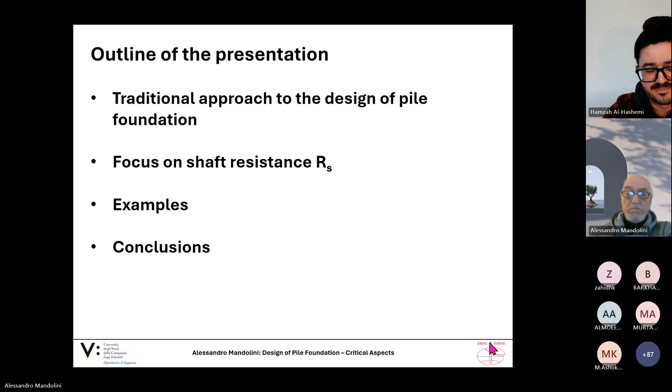The first point we have to take is to recall what we as foundation engineers typically do when the decision of using piles has been taken. It means I will not deal with all the problems related to selecting the right type of foundations depending on the structure, soil conditions, and economical aspects of a design, which is a very complex matter. I will go directly to pile foundations, assuming that all the thoughts about why we are selecting piles have been analyzed and the decision has been taken.

Typically, in a traditional design approach, we focus our attention on the single pile response to vertical and horizontal loads in terms of bearing capacity and movements. Here you can see typical load settlement relationships coming from some experiments on single piles.

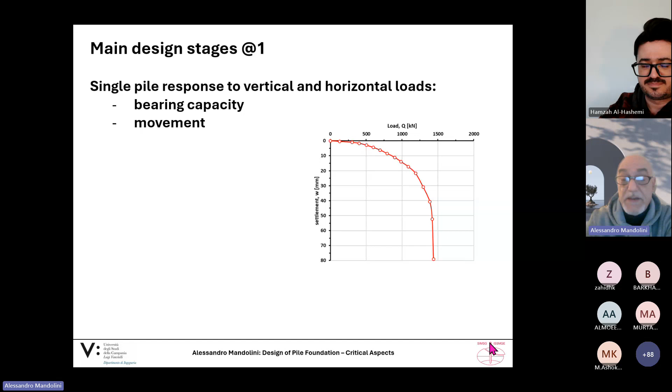Then we try to extrapolate the behavior of single piles to the group by considering the interaction among piles, both when approaching failure, looking at single pile failure or row of piles or block failure mechanisms, and then under design working loads, because we are requested to give our estimate of vertical and horizontal displacements, rotations, and so on, in order to be sure that under working conditions all the limit states are fulfilled and the expected behavior of a structure is satisfied.

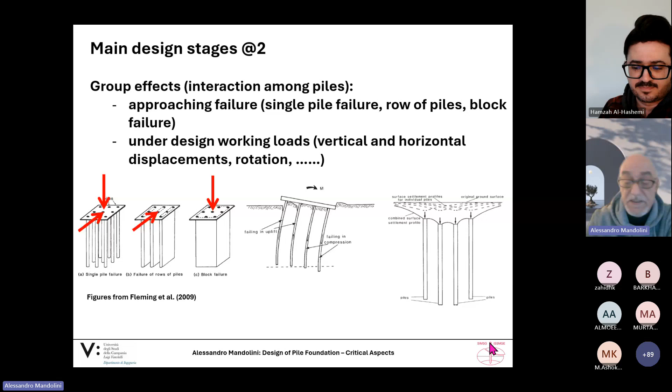What is very important to recall is that the prediction of single pile response to loads is a fundamental step of the design process, because we are always asked to predict in a better way the response to load. We must be aware that any error concerning the prediction of the behavior of the single pile is reflected, if not amplified, in the prediction of the behavior of the entire pile foundation. That means we must be very careful when dealing with single pile response to load, because the reliability of our design strictly depends on how reliable is the prediction of the single pile.

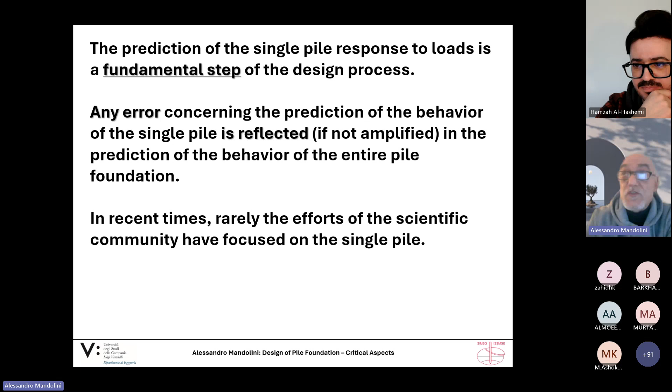I have noted, and the paper I mentioned is in some way a proof of that, that in recent times, rarely have the efforts of the scientific community focused on the single pile. In recent years we have seen growth of methods concerning pile groups and pile rafts, but regarding single piles, it seems the accumulated knowledge in the past was considered enough to proceed. This is my personal opinion, so I think we have to go back to the single pile in order to improve our capability to correctly design pile foundations.

So if we concentrate our attention on vertical loads, because it's the most typical loading condition on pile foundations, as all of you know, the applied load at the head of the pile is resisted by shaft friction, Q sub S, and normal stress at the pile base, Q sub B.

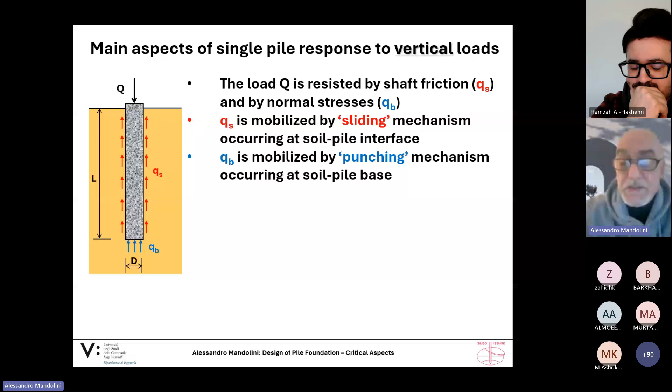The two unit resistances are mobilized by very different mechanisms. The shaft friction is mobilized by sliding mechanisms occurring at the soil-pile interface, while the base resistance is mobilized by punching mechanisms occurring at the soil-pile base. These two different mechanisms imply that the required movements are very different: few millimeters for the sliding mechanisms along the pile shaft, and some percent of pile diameter, meaning centimeters if not tens of centimeters, one or two orders of magnitude larger, for the punching mechanisms at the pile base.

But before pile base resistance is activated, very often, except for particular cases, pile shaft resistance is partially, if not fully, mobilized. And this is very important, because if we go through our experience accumulated over time...

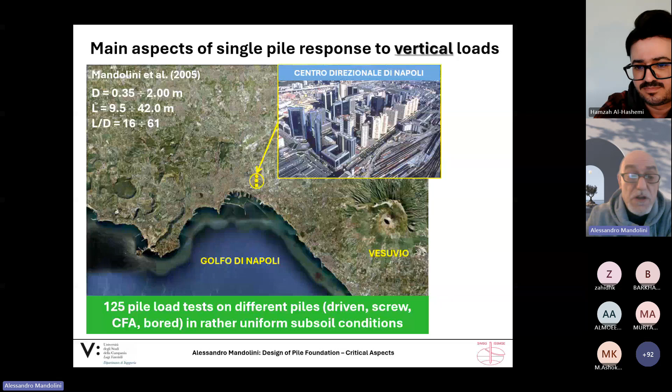Here you see the aerial map of my city, and in the past we have collected exactly 125 pile tests on different piles - driven, screw, continuous flight auger, and bored - in rather uniform subsoil conditions. As you can see, the pile diameters range between 0.35 meters and 2 meters, the length from 9.5 meters to 42 meters, and a slenderness ratio from about 15 to 60.

All the results we get, shown here just as an example, are giving us the same information. That is, if we perform a load test on a single pile and conventionally define the ultimate resistance of a single pile as the resistance corresponding to some settlement, very often in Italy by law, as in Europe by Eurocodes, at 10% of pile diameter, you can read on the single pile load settlement curves the final ultimate value, which in this example is 3.2 meganewtons.

So if we look at some working conditions, for instance at a load of 1.2 meganewton corresponding to a global factor of safety of about 2.7 for this pile, but the same is true for the other 124 piles, we observe that all the load is transferred along a reduced pile length, an active or critical pile length, that can be estimated very simply by this equation. It means that under working conditions, the pile response is ruled by pile shaft.

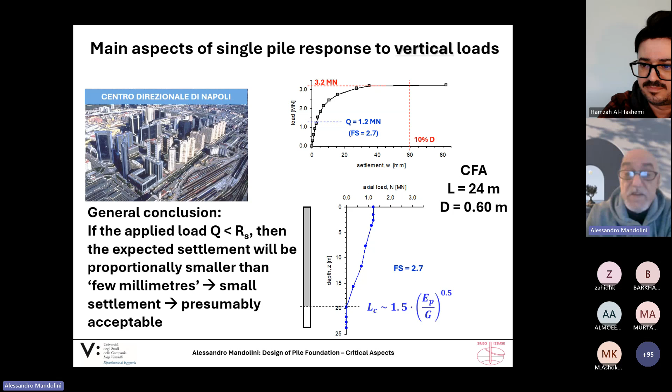Please remember that due to the sliding mechanisms occurring at the pile shaft, this resistance is mobilized at few millimeters. That means, again, that if we apply a load below the shaft resistance, the expected settlement of the single pile will be proportionally smaller than a few millimeters. That means small settlement, even if amplified by group effects due to interaction among piles. Presumably the settlement of the pile group will be acceptable and serviceability limit state will be satisfied.

Obviously, the implication for design is that in order to be sure that we are applying on the pile a load below the shaft resistance, we should have a correct evaluation of the shaft resistance. Otherwise, we could be wrong. This is the reason why I will continue my presentation focusing on shaft resistance, starting from the important statement made by Terzaghi in his very famous book.

Theoretical Soil Mechanics, written by the father of soil mechanics, Professor Terzaghi. In some page, he stated: our knowledge of the influence of the method of installing the piles on the skin friction and on the intensity of the shearing stresses is still rudimentary, and the prospects for evaluating this influence by theory are very slight. Clearly, it is a statement of more than 80 years ago, so maybe some steps forward are available now.

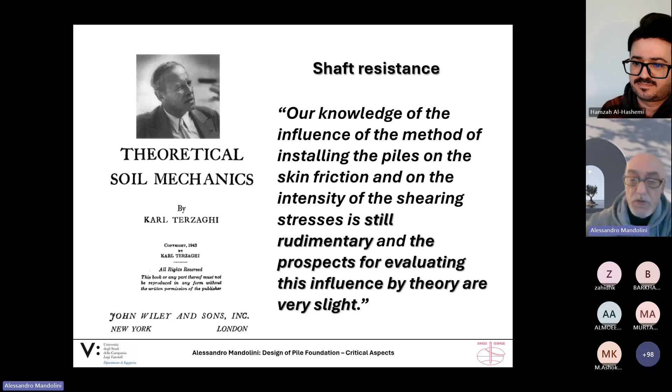If we go to the way in which we evaluate the shaft resistance by methods based on soil parameters, typically we assume that the skin friction is proportional to the normal horizontal stresses acting along the pile shaft at failure, sigma prime RF, affected by some friction coefficient, tangent of delta. And typically what we do is assume that the horizontal stress at failure is proportional to the vertical effective stress by some magic parameter K that depends on the pile type and the soil type.

For instance, here you can see a table given by Poulos, Carter, and Small in their state-of-the-art report delivered at the 15th International Conference of Soil Mechanics and Geotechnical Engineering held in Istanbul in 2001, referring to the indication given for bored piles in sandy soils.

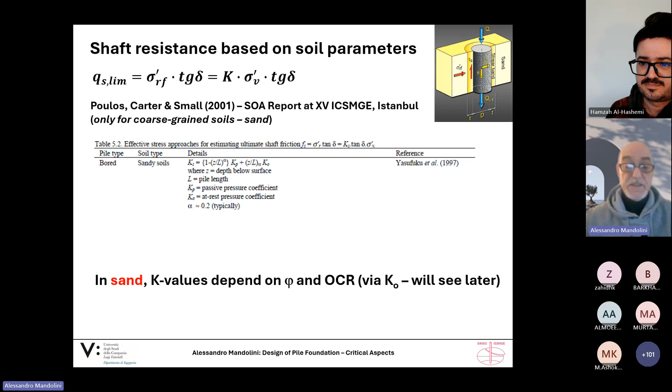If we go to a recent book, I could say recent, but it is 13 years ago, written by Viggiani, Russo, and myself, still referring to sandy soils, you see a lot of K values given for different pile types, depending only on relative density. So if we put together the two indications from literature, as you can imagine there are a lot of other indications, but more or less all are based on the same fundamental parameters: the friction angle, the overconsolidation ratio, and the relative density of the soil, if we are dealing with coarse-grained soils, sand, in all the tables I showed you before.

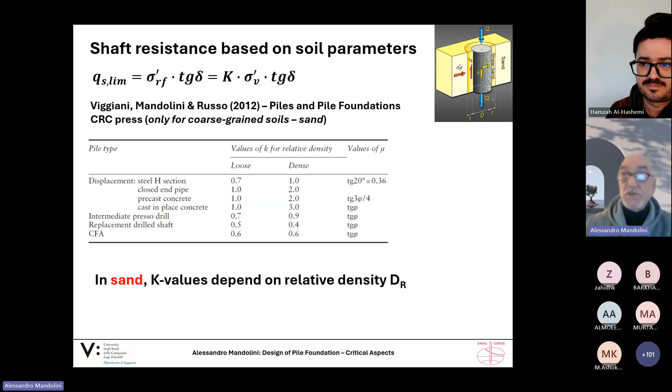So I appreciated very much what Professor Randolph from University of Western Australia stated in one of the last sentences of his Rankine Lecture held at the Institution of Civil Engineers in 2003: if we are to continue to attract the best of each new generation of engineers, and you are the best of each new generation, then we must incorporate science in our teaching and our practice, using empirical approaches to validate and calibrate, but not replace, scientific theory.

In some way, Professor Randolph is supporting the idea that empirical methods are good enough, especially when dealing with piles, but empirical methods should be based on theoretical consideration in order to be understood and to be rightly driven to give their best results.

In other words, we could say that a scientific approach to estimate shaft resistance should be based on all those factors considered relevant, as derived from wide theoretical and experimental research.

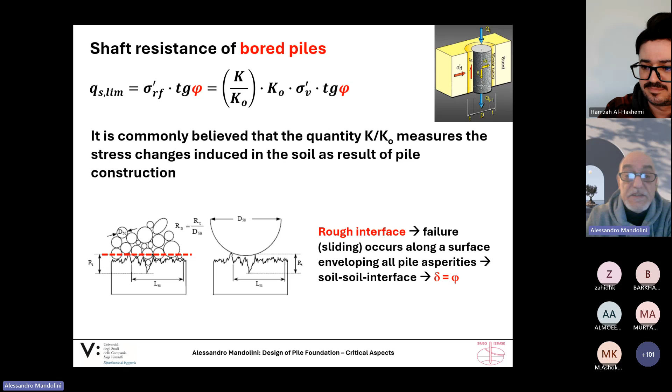First of all, when dealing with bored piles, we know that the interface between pile and soil is such that the slip surface is obtained by enveloping all pile asperities, resulting in failure occurring in the soil. That means at the soil-soil interface, the friction coefficient, depending on some value delta, can be assumed without doubt as the friction angle of the soil. The problem is the K value.

If we look at experiments from all over the world, we know that for poorly constructed bored piles, this ratio is typically lesser than 1, rarely lesser than 2/3. For well-constructed bored piles, meaning piles installed without changing the state of stress in the soil, this ratio is about 1. If we are installing continuous flight auger piles, this ratio, depending on the equipment parameters adopted during installation—that is, the rate of penetration of the screw into the soil as well as the rate of revolution—we could obtain a ratio up to 1.5.

But assuming a classical well-constructed bored pile, as we must do when designing, because when designing we cannot assume that the pile will be constructed in a wrong way, we can assume that the K value is equal to K naught.

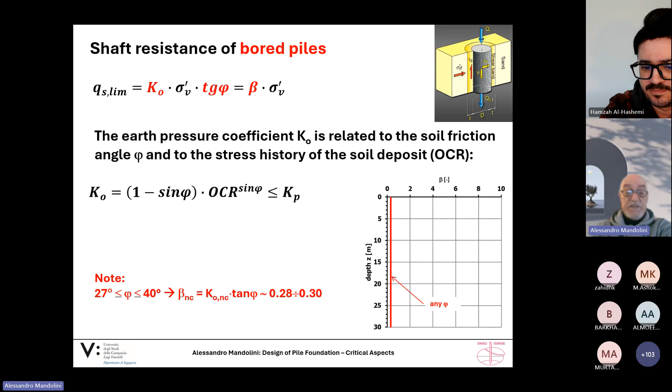If we look at this relation and consider a normally consolidated sandy soil, we find that independent of the friction angle value, ranging from 27 degrees to 40 degrees, the beta value—that is the product of K naught and tangent phi—is almost constant, because K naught is a decreasing function of phi, tangent phi is an increasing function of phi, and for this range of phi the product is constant. That means for normally consolidated sand, we should have a beta value on the order of 0.3, always around 0.3.

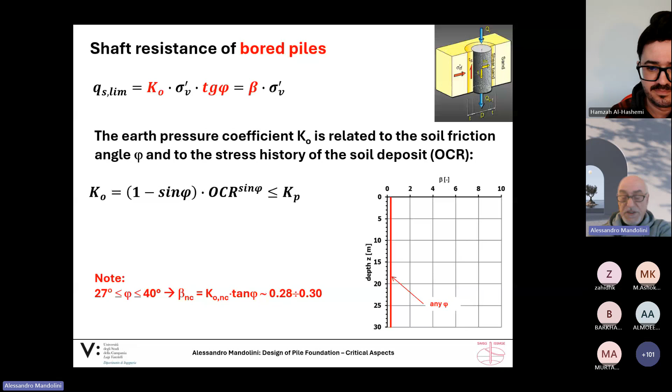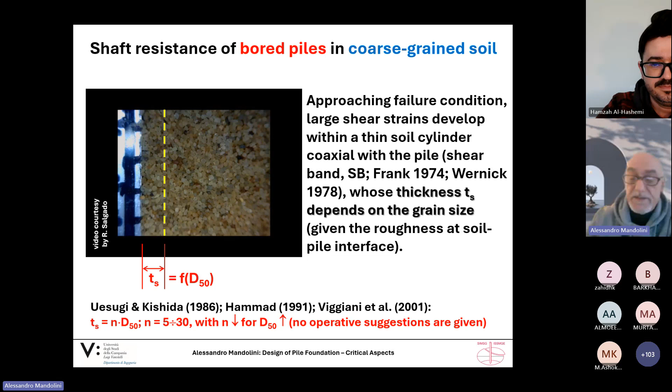That coefficient ranges between 5 and 30, depending on D50. But no operative suggestions are given. So for the design, we don't know if we have to assume 5, 10, 20, or some other number in order to understand the thickness of the shear band. And the thickness of the shear band is very important.

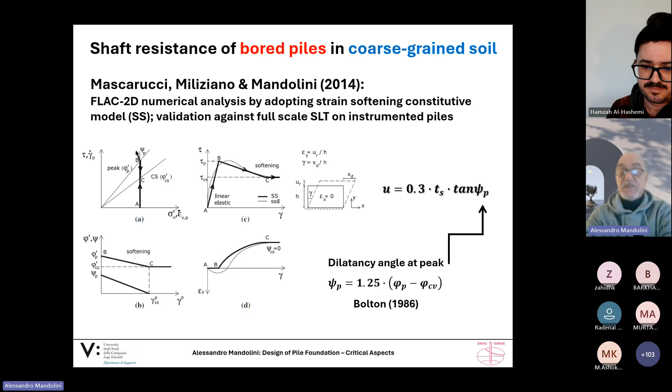And we got a rule to estimate the movements, the radial displacement U, depending on the shear band thickness Ts and the tangent of the dilatancy angle at peak, as defined by the Bolton dilatancy theory published in Geotechnique in '86. And it is very important because...

Dilatancy always occurs, at least at shallow depth. You know that dilatancy is a mechanism occurring as a function of the relative density and mean stress. At shallow depth, mean stress is very low, and also a loose soil can dilate. So dilatancy always occurs, depending on the relative density and mean stress.

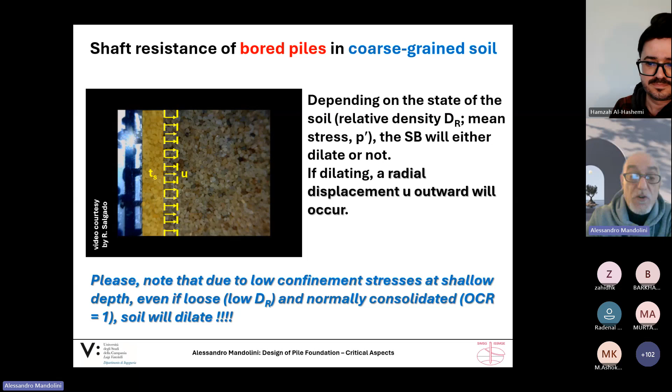Dilatancy can play an important role over a reduced pile length, or over all the pile length if the soil is dense or over-consolidated. Due to this dilation, the soil mass will react during loading, not during construction as stated before, but during loading, by increasing the horizontal stress, and the increase will depend mainly on the soil stiffness. So we could say that the dilation of the shear band triggers the involvement of the soil stiffness in the interface response in order to develop the skin friction along the pile shaft.

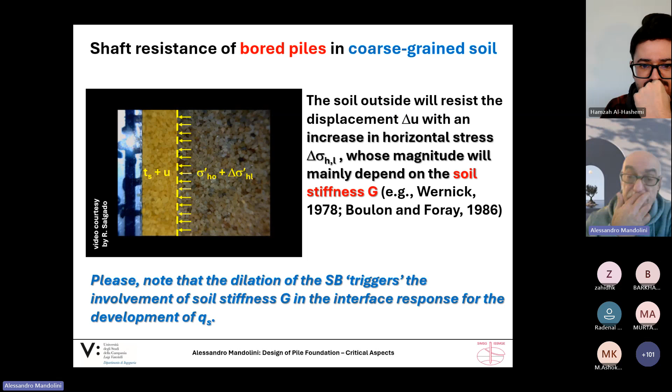All the methods we have seen until now very often do not consider soil stiffness for determining soil resistance, in this case pile soil resistance. So we have a coupling of stiffness and resistance in developing skin friction along the pile shaft. If we consider these very simple methods based on cylindrical cavity expansion, and for the sake of simplicity refer to the elastic assumption, the stiffness of the spring along the pile shaft can be simply obtained by this formula you see here.

But considering that very often the thickness of the shear band is very small compared to the pile diameter, we can simplify the formula, relating the stiffness of the spring along the pile shaft not only to the soil stiffness but also to the pile diameter, by this equation. Combining all into the fundamental equation for the skin friction, where we have not only the original state of stress but also the increase of stress into the soil due to dilation, proportional to displacement U, we get this equation.

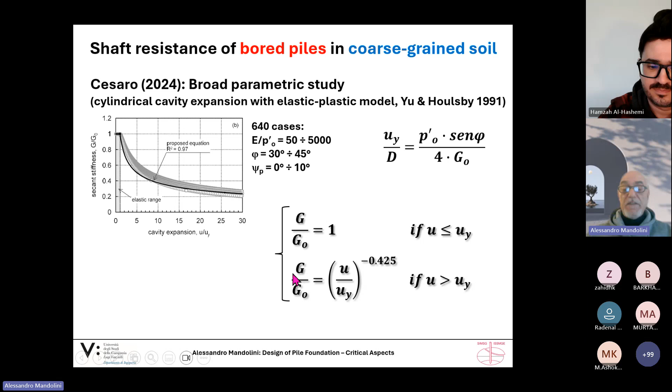He found that until the displacement at the pile-soil interface is lesser than some yielding value related to the stiffness ratio and friction angle of the soil, the engaged stiffness of the soil will be the small shear stiffness. But if dilatancy determines an outward displacement larger than this value, the stiffness will decay following this simple formula.

So to summarize what we have presented here: typically when dealing with piles in coarse-grained soil deposits, we have no availability of lab tests on undisturbed soil samples, because of the impossibility to retrieve undisturbed soil samples in this kind of soil, apart from very particular techniques.

So we typically use results of in situ tests - CPT, SPT, seismic profiles, and so on - to estimate the relevant soil parameters: the unit weight of soil, the friction angle, the over-consolidation ratio, the relative density, and the shear stiffness at small strain.

But we can also perform lab tests to estimate intrinsic soil properties, like friction angle at critical states. We can perform lab tests on disturbed soil samples to estimate phi CV, and very simple and basic soil grain size distributions to get D50 and coefficient of uniformity.

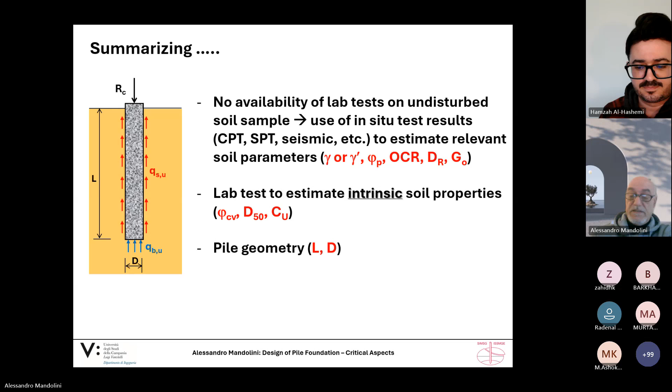So for a given pile geometry, meaning given pile length and pile diameter, we could follow the following procedure, keeping in mind that the reference formula at a given depth Z is what is shown in the lower part of the slides. So we need all those parameters shown in the upper part of the slides.

First of all, we can estimate K-naught using the Mayne and Kulhawy relationship. Then we can estimate the mean stress at depth Z, involving the unit weight of soil, total or submerged, depending on water condition. Then, by the relation I showed before, we can estimate the shear band thickness depending on D50, phi CV, and coefficient of uniformity. Then, by Bolton's theory, we can estimate the dilatancy friction angle at peak.

Then we can estimate the outward movements due to dilatancy, estimate the yielding outward movements, and then, depending on the movements, we can use G-naught or a reduced value of shear stiffness, considering in an equivalent elastic theory the reduction of stiffness due to soil nonlinearity and plasticity.

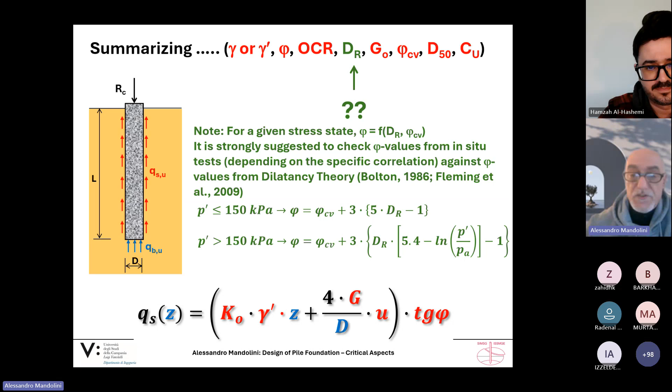So, coming back to the previous slides - is it only OCR effects that explain this scattering we are seeing? No. There is an increase of skin friction, as measured by delta beta, due to some factors suggested by the authors I mentioned before, Poulos and co-authors, Viggiani and co-authors, but also by other factors like the stiffness ratio, the soil grain size distribution, D50, and coefficient of uniformity, scaled by the pile diameter.

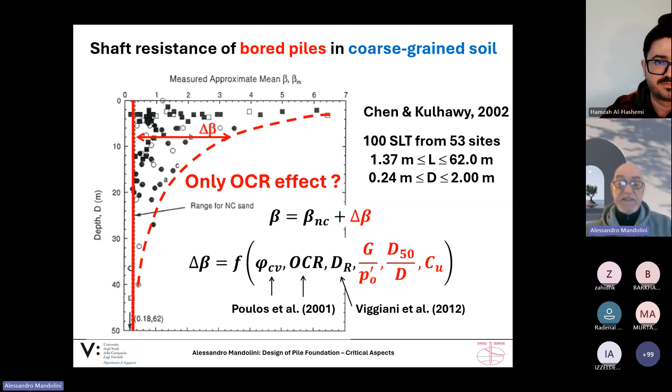I will give you a comment in the next few slides because I'm going to conclude. But before concluding, I want to show you the application of the method on the occasion of the international experimental sites for testing we organized by the TC212 Technical Committee of the International Society for Soil Mechanics and Geotechnical Engineering.

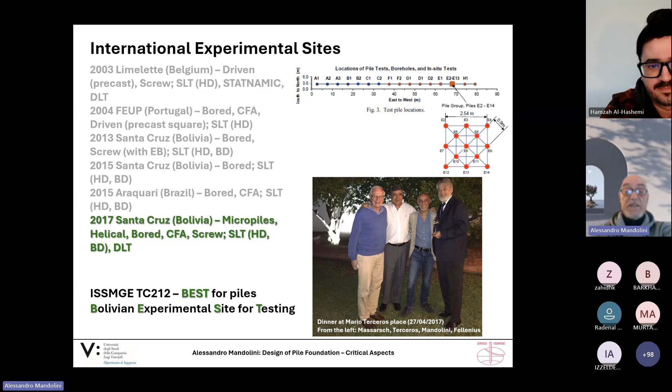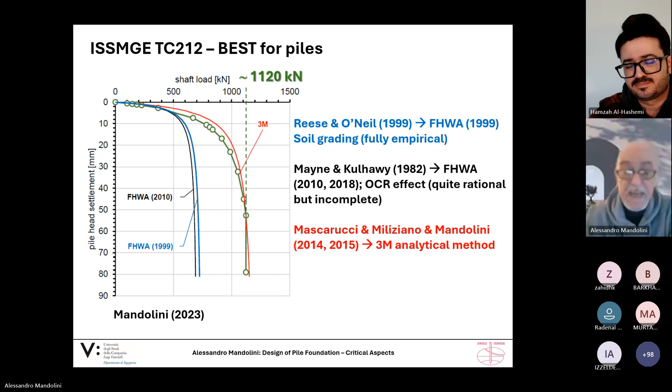So, summarizing, if you want to apply the method at a given depth, please estimate the at-rest horizontal stress. Then try to estimate the change due to the pile construction. This is not simple, it's a very difficult task, but we are asked to do that.

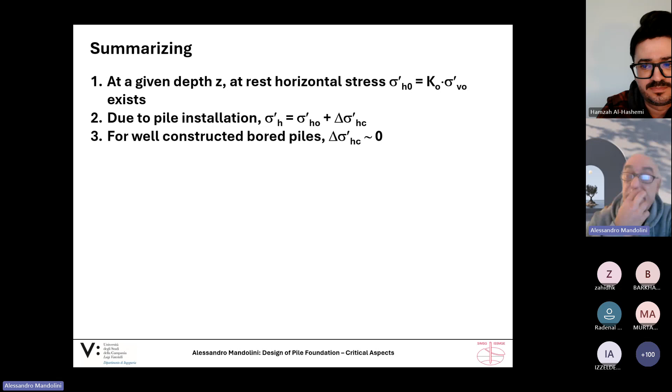If we assume the pile is well constructed and we are dealing with bored piles, we can reasonably assume this change is almost equal to zero.

Then, during the loading stage, since a shear band develops at the pile-soil interface, we must estimate its thickness by taking into account physical intrinsic soil properties, D50 and coefficient of uniformity, and particle shape as represented by friction angle at critical state.

Then estimate the outward movement U in order to evaluate the increase of horizontal stress in the soil while approaching failure during the loading stage. At failure, you will have the true horizontal effective stress acting on the pile surface, from which the skin friction depends.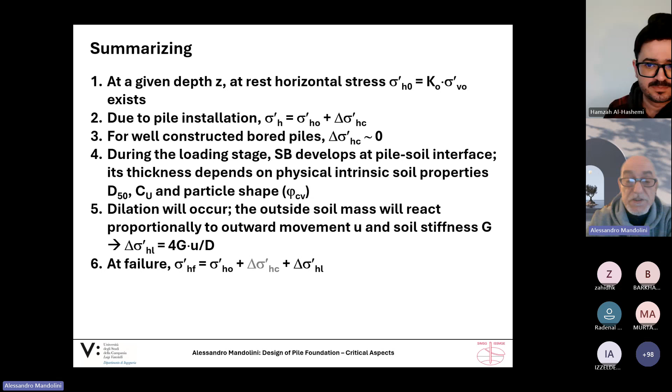Please note, very important: it is not important how much the outward movement is, and it is not important how large the pile diameter is. What is important is the ratio.

If we have large diameter bored piles, meaning large D, in a very fine sand, meaning small D50 and small TS, then small u, the dilation will play a negligible role. On the contrary, with small to medium pile diameters in coarser soils like medium sand to gravel, the dilation will play a fundamental role in developing skin friction.

This is not considered until now, and it's very important because very often we perform load tests to failure on a pile with a smaller diameter, instrumented to measure skin friction, and assume the same skin friction will be available at the interface with a larger diameter pile. It is not true, because the pile diameter plays a role in the dilation, as I tried to demonstrate.

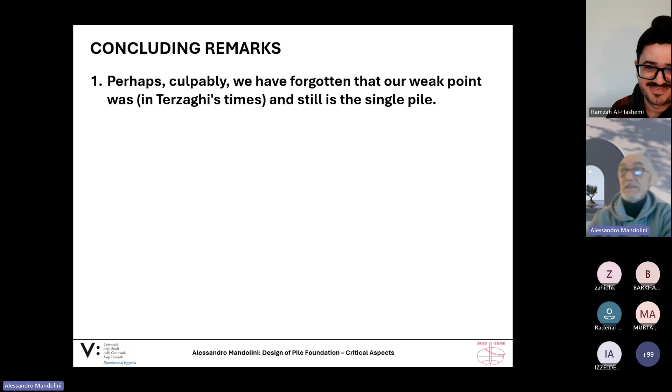So, concluding remarks. I think that, perhaps culpably, we have forgotten that our weak point is still the single pile, not only as in Terzaghi's times, but now it is still true.

I also understand that we love empirical methods because they are easy to use and presumed to be accurate, since the empirical values we put in come from experience, so we trust them. But please consider that if used as a black box for any pile, for any soil, independent of the soil grain size distribution, independent of the dilation potential of the soil and so on, they can lead to significant errors.

So, according to the statement made by Professor Randolph in his Rankine lecture, I think the best empirical method is one developed from theoretical considerations, then calibrated using experimental data with few, preferably, parameters of clear physical significance, therefore measurable, and not just numbers, as we typically do in our daily practice.

So the last slide is not my personal opinion, but an opinion expressed by Maxwell, who, as you know, is the father of the theory of electromagnetic radiation, whose well-known equations were the basis of the unification in physics, the second great unification after that realized by Newton.

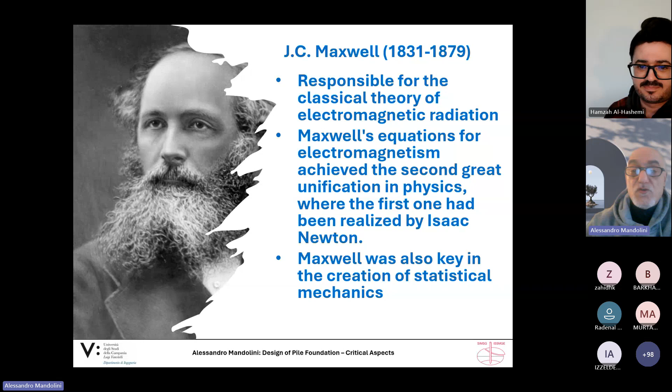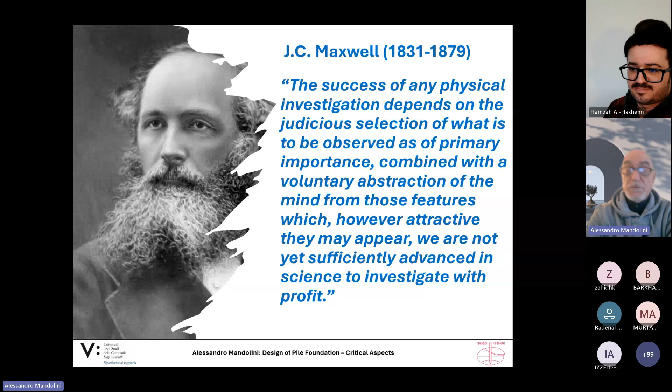Maxwell, probably thinking of piles, said the success of any physical investigation depends on the judicious selection of what is to be observed as of primary importance, combined with a voluntary abstraction of the mind from those features which, however attractive they may appear, we are not yet sufficiently advanced in science to investigate with profit. That means I'm not sure other parameters could be relevant. I'm just saying please start by including those parameters we have observed to be of primary importance. Then we could work on the secondary parameters on which we have no clear idea yet. If we continue to use empirical methods in a black box way, we will be wrong.

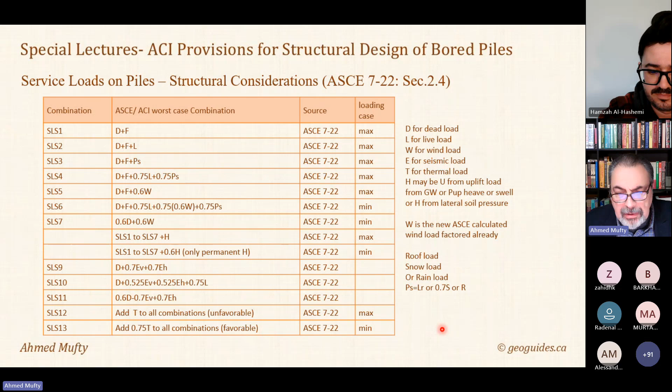The geotechnical part of the service loads is based on ACI 336, not ASCE 7. Of course ASCE 7 is important here because ACI 318 does not have service loads anymore - it refers you to ASCE 7. So here you can see we are checking with factors of safety. You calculate QB ultimate, the base resistance or end bearing resistance, and QS ultimate, the ultimate shaft resistance, and check the service load in this table as shown, each one with a different checking capacity.

So you have 3 factors of safety here. I usually use 4. The first factor of safety is for the QB ultimate, so it's for end bearing. FS2 is for skin friction. FS3 is a combined factor of safety for both.

There is also a possibility that you can use another factor of safety only for skin friction. You ignore the ultimate end bearing in long piles. If you have a long pile, there's no meaning to add end bearing resistance to the capacity, because you will never reach the base with any load, so you're not transferring any load to the bottom. So you should not take the base resistance in the capacity. At that time, you need another factor of safety, which is for QS ultimate alone, with no QB ultimate with it.

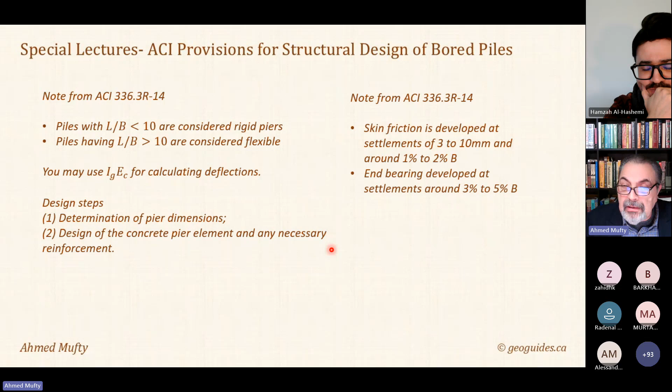Skin friction is developed at a settlement of around 3 to 10 millimeters, around 1% to 2% of the breadth, while end bearing usually develops at settlements around 3% to 5%, and to reach real ultimate conditions you may need to reach 10%.

Ultimate loads on piles are taken from ACI 318-2025. These are 7 main combinations, and you can see there is a combination for earthquake and a combination for wind, we are not replacing them, each one has its own combination. The E, which is the earthquake forces, may be horizontal or vertical, so if it is vertical, you may need to subtract instead of adding.

The effect of the fluid is not the effect of groundwater, so we need to distinguish these two from each other. They are both fluid, but this is coming from H, the groundwater effects or the earth pressure effects, and F is coming from fluids like a storage tank, like a swimming pool, like any pond or something within the building.

These F factors should be taken into consideration carefully, because if F adds to the primary load and is permanent, you need to add it to the dead load, and it will be multiplied by the factors of the dead load. If F is countering the main loading case, here are the main loading cases.

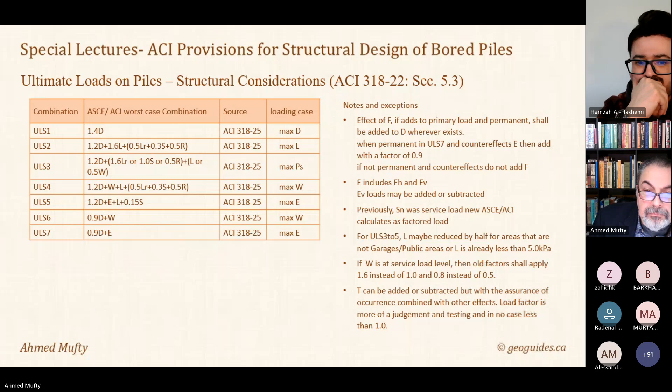Now we're talking about an important part, which is the earth pressure and the groundwater. In the old ASCE or ACI, H was taken as one unit, so even groundwater was treated like earth pressure. If you have 10 meters of groundwater, why do I multiply by 1.6? That was the question I always asked myself.

Now in the new recommendations, they changed this. They divided H into H-EB, which is coming from soil, and H-W, which is coming from groundwater. So now the load factor of the groundwater is different, it's not 1.6 anymore. This is a huge difference in the new loading system.

You also need to take care about the groundwater effects, whether they are countering the maximum or main effect or not. You should treat it like a fluid. If it is permanent and has a minimum permanent elevation, then you can include it with a factor of 0.9. Otherwise, you should not add it. If it is a fluctuating groundwater, you should not add it to the equations if it is countering the effect.

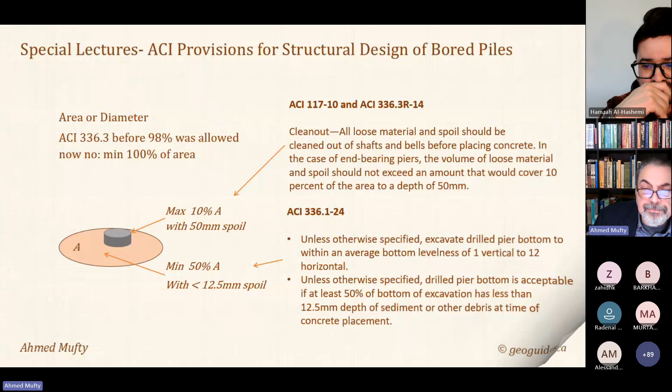Oh my God, the shift. This one is a headache for structural designers of piles, of bored piles, because location shift means extra moment. An extra moment will need more reinforcement, and that reinforcement, if you calculate like 2 bars more in every pile, you're going to hundreds of tons in big projects.

Anyway, we should follow the standards, and there is no chance to leave the shift tolerance without approaching it. ACI 336.3 says it should be the lesser of 4.2% of the diameter of the breadth, or 75 millimeters.

ACI 318-25 requires 75 millimeter shift in design. It clearly states you need to design for 75 millimeters shift, the new ACI.

If you remember the old ACIs, there was no pile design in ACI 99 or ACI 2005. There was no pile design included in these standards. We were following them as design of columns, but they were not meant for that. There was a clear statement in the beginning that ACI Code 318 does not cover deep foundations. But now they included it, and it's part of the foundations chapter, which is chapter 13.

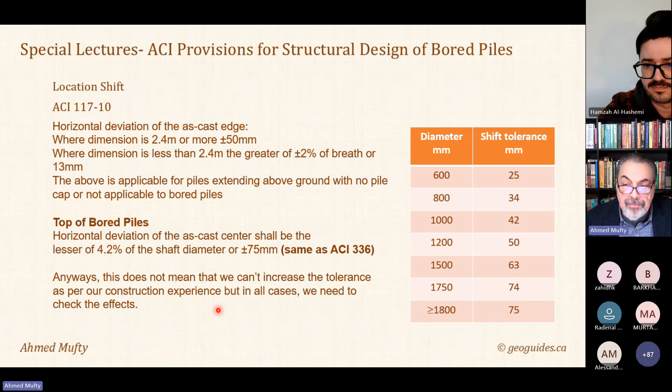Out of plumbness: if the pile is straight, out of plumbness is 0. If the pile is inclined or waving around the main axis, you are allowed up to 1.5%, so 1 over 66.5, in the ACI spec 336.1, 2024 - not 2014, 2024. This governs over the one in ACI 117-10, because ACI 117-10 allows 1 to 50.

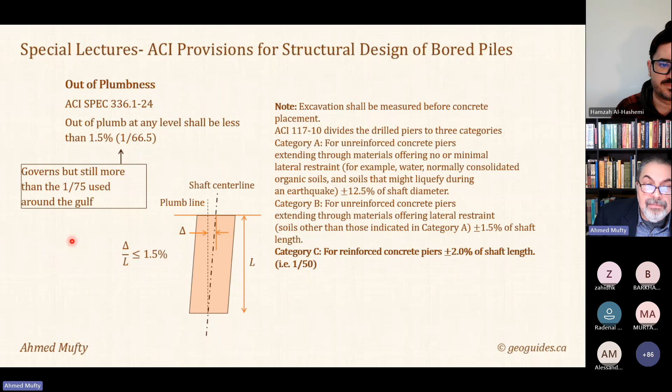And if you remember our projects in the Gulf region, we use 1 over 75. So this is more than 1 over 75 and less than ACI 117-10's 1 over 50. So I think 1 over 75 is... not conservative, sorry, it is more strict - 1 over 75. We should follow the 1 over 75. It gives better design for us as piling designers.

Why is the shift not important when there are many piles and there's a pile cap? If you have one row of piles and you have moments, and one pile is shifted outside, you will have moment in the other direction. There's no moment in the other direction in the main design loads, but if the pile is shifted, you will create a moment in the other direction. That's why the shift is very important when you have one row of piles or a single pile under a column - you have a column, then you shift it half a meter away, the column will not sit on the pile anymore.

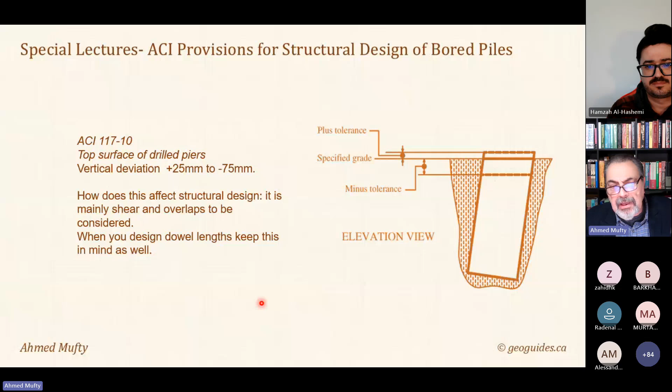This is ACI 117-10 again. How much is the pile allowed to go up or down? The top surface of the drilled pile, the bored pile, the vertical deviation is plus 25 and minus 75. This is like for the key that you add to the pile cap. Deviation from cross-sectional dimensions - how much you can have more than the pile diameter and how much less than the pile diameter. It says here you are allowed to have minus 12.5 to plus 50.

But in fact, you need to keep 100% of the area anyway. Whether you have a smaller diameter or bigger diameter, the area should be 100%.

Reinforcement tolerances - we have a cover problem. Concrete cover is measured perpendicular to the concrete surface, so from the concrete surface to the edge of the reinforcement. Reduction in cover should not exceed 12.5, and should not exceed a third of the specified concrete cover. In ACI 336.1 2001, the minimum concrete cover was 75 millimeters.

While you're moving the casing, taking it out, you should not cause any shift to the reinforcement more than 150 millimeters. In 336.1.24, the cover now has two values: 75 millimeters or 4 times the maximum diameter of the aggregate. This is if you have a liner - a liner means a casing like that. If you have direct soil contact, the distance from the soil to the reinforcement should be more than 4 times the maximum diameter of the aggregate, or 100 millimeters. This is new in 2024 - they moved to 100 millimeters, not 75 anymore. And this one, by the way, it's 80 already - if you have 20 millimeters maximum diameter, this is 4 times 20, which is 80.

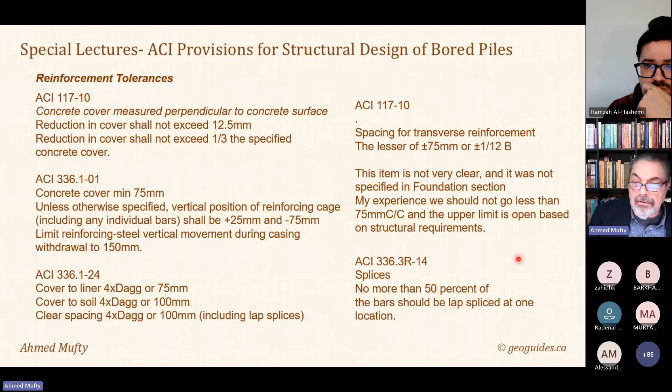In 336.3 2014, splices: no more than 50% of the bars should be lapped. This is a mistake we all had before, and may continue having if we don't recognize that we need staggering when overlapping. So when you have bars to be overlapped, you shouldn't overlap them all in the same zone - no, you should lap one here, then the next one there. Maximum you can lap in one zone is 50% of the bars. Why didn't we have problems? Of course we didn't, because after 12 meters the moment is almost gone - that's why the piles are surviving.

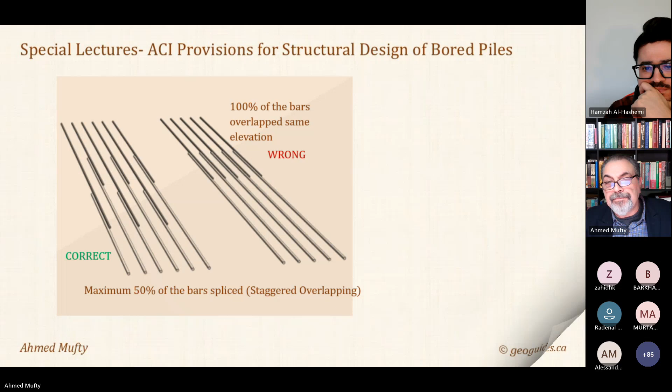Concrete strength in ACI 336.1 2024: they say every average of 3 consecutive strength tests should be equal to or exceed the 28-day compressive strength. That means if at 28 days you have 40, 45, and 50, and yours is 45 - the characteristic design strength - it's fine. The next 3, you can even take 2 from this 3 if you want. So every consecutive 3 tests should give an average of the characteristic design strength. Of course this is a lot - you can take them 3 by 3, every 3. But you should remember the batch number, age of testing, and pile numbers that were cast with that concrete. Having a pile log is very important.

No strength test result should fall below F'c by more than 3.5 MPa if F'c is 35 MPa or less. So at 35 or less, you should not have a deviation from the characteristic strength of more than 3.5 MPa. But if it is above 35 MPa, then you go with 10% of F'c. So if you are at 40, you should go with 4; if you are at 50, you should go with 5. So if 50 MPa is your strength, you should not have any test result below 45.

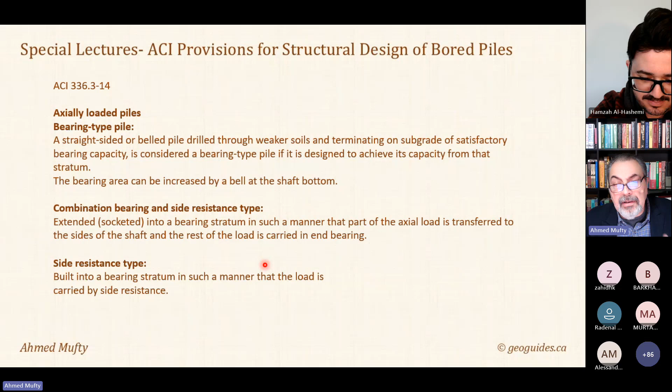Laterally loaded piles, we have rigid piles and flexible piles, and the factors affecting rigidity of the pile are soil and rock qualities, characteristics, and contact surface between pile and subgrade.

What is the interaction? Relative stiffness factor and embedded length of the pile. As much as the pile is longer, you're going to the flexible side.

Contribution of piles to lateral loading: how do they share? So if you have a lateral load, horizontal load, you have leading piles and trailing piles or shadow piles. So leading piles are the piles in the front, facing the soil.

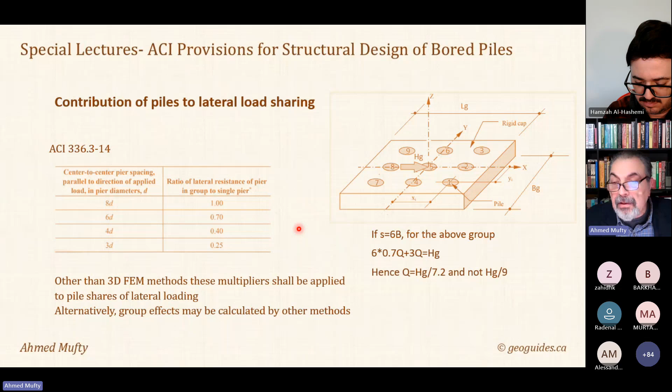Of course, this is a hand tool, but if you use finite element methods, you can use multipliers for the piles, different multipliers. You may have shear in both directions, so you have different multipliers, and also you can add more systematic automatic group effects.

You can have a look at software like RSPile or LPile. Not LPile - LPile doesn't have a group.

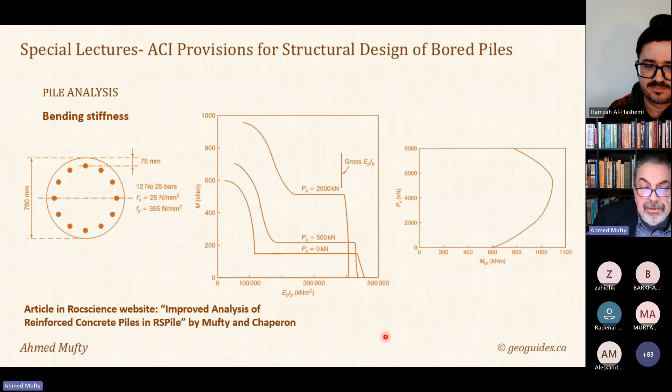By the way, you can have a look at this article on our website, the Rocscience website: 'Improved Analysis of Reinforced Concrete Piles in RSPile,' explaining this idea and how RSPile works.

This is not available in most other software, maybe not available in any other software. So the propagation of the cracking changes the moment of inertia.

For example, this one is done by RSPile, and from RSPile you can have interaction diagrams, a three-dimensional interaction surface. You can have the factored interaction diagram and the unfactored interaction diagram, and cuts at these levels which shows MX, MY - so this is biaxial.

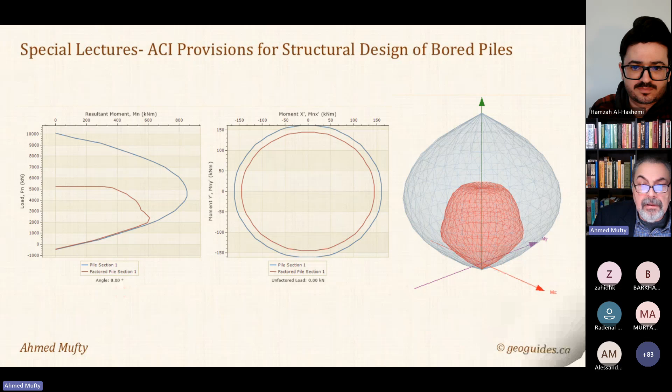ACI 318 in 2025 requires, or required, EI of this ACI. We are interested in columns for piles. So in this table, if you combine axial load with moments, you can use 0.7 I gross.

You should be very careful about what I'm talking about. These are ultimate loads, and people don't know this. People design and analyze with I gross. You don't need to analyze with I gross in a cracked section. So you understand now why we are decreasing the I gross here.

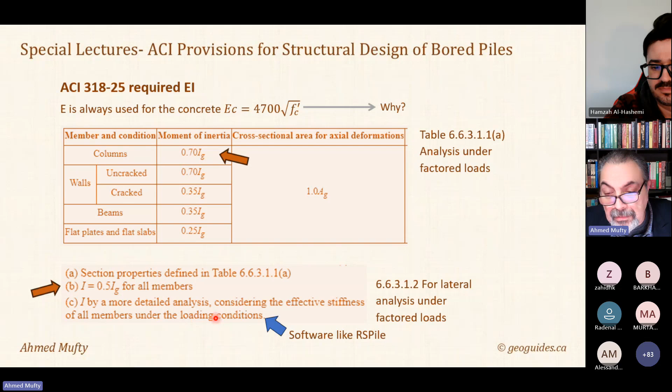And if you have lateral load only, like you are superpositioning lateral load analysis with axial load analysis, if you are analyzing the lateral load alone, you can use 0.5 I gross. This is very interesting - you can decrease your reinforcement too much with this factor. And if you have more detailed analysis, like a software, you can use the software which changes the bending stiffness according to the crack propagation, so you don't have a problem.

Now we finished with ultimate loads. I want deflections, I want shortening of the pile. What should I do? I will use, according to ACI 318-25, 1.4 times the I chosen there.

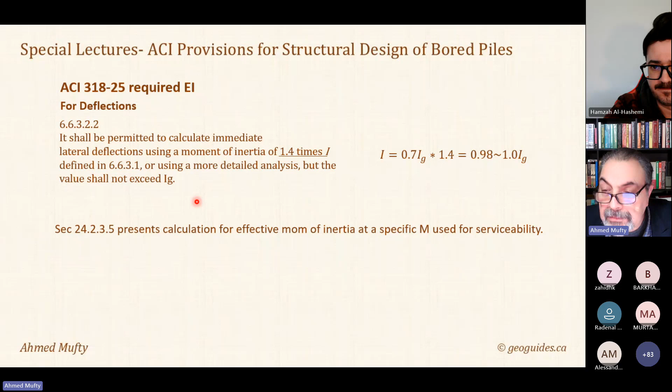So if I have only lateral load, I will use 1.4 times 0.5, but it's better to use with the 0.7. So I'm advising that you should use I gross for calculating deflections, and you should use 0.5 I gross if you're analyzing only for lateral, and you use 0.7 I gross if you're combining the loads lateral and axial in one analysis.

Like this one is an old sheet of mine, but you can see here I'm adding a factor for EI. I can put any factor I want to change the EI calculated from E of concrete and I gross. Of course, E of concrete is allowed by all the codes, but you can also increase that E a little bit with the amount of reinforcement by the composite section analysis. But usually it's not that much different.

Why is it not that much different? Because the reinforcement ratio is so small.

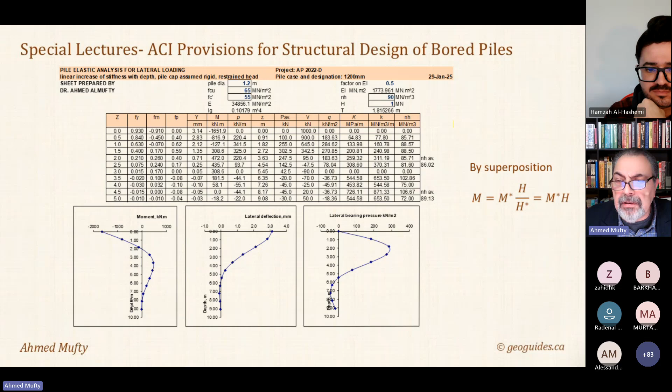If you have axial capacity by allowable method, ACI 318 allows you to use these two equations directly for uncased piles or cast in place piles in rock or within a pipe, but not conforming with some other provisions. I don't care - if you are designing, you can use these. You can use this always for axial load.

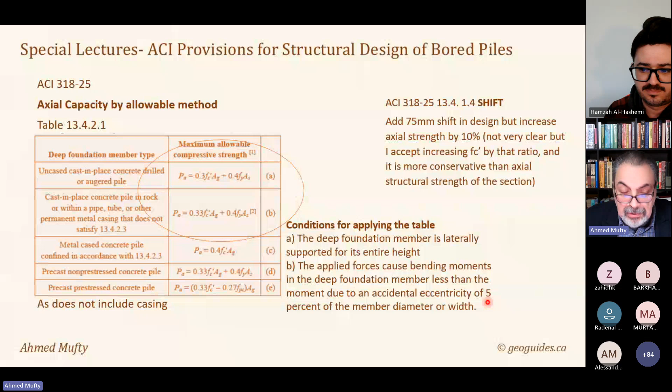If you have axial load only, but what does it mean to have axial load only? It means that your moment is less than the moment of the 5% eccentricity, the accidental one. And also it is fully supported - it's fully inside the soil, and the soil is competent.

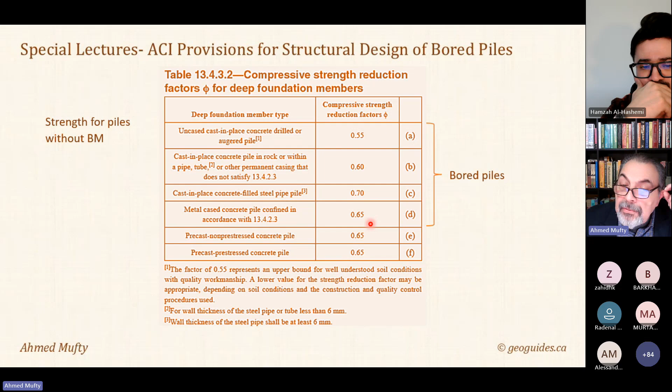Compressive strength reduction: so if you have only axial load, you can use these factors for the strength reduction factor. These are not used for shear and moment, and moment and axial.

In designing piles for reinforcement, you need to know that you can decrease the minimum of the minimum - that 0.01 A gross, 1% to 8%. Do you know that you can decrease this amount to 0.5% in ACI 318? In ACI 318, you can design the pile with less area and get the reinforcement required. And if the pile is successful with that smaller area, you can use that percentage of reinforcement as percentage for the whole area. But you're not allowed to go less than half of the area.

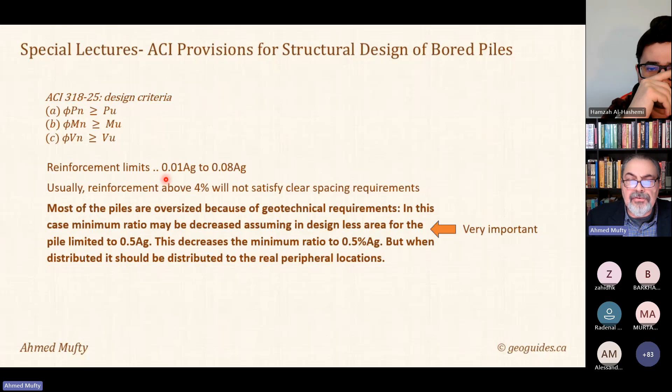I hope you understood this one. This is very important - it decreases your minimum reinforcement. If you go to any authority, it will tell you no, minimum is 1%. No, it's not 1%, it's 0.5% if the pile is successful with half the area. So it means you have an oversized pile just because of geotechnical requirements, not because of structural needs.

Strength reduction factors vary if you have moment and axial force combined, from 0.65 to 0.9. For shear, it's 0.75. But for shear in deep foundations, for combinations of load that include earthquake, you should go with 0.6.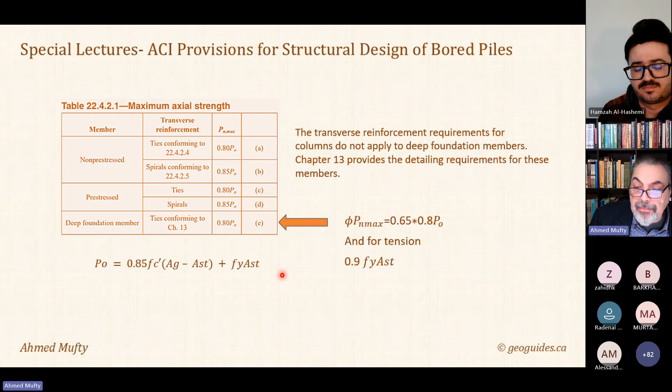You can use 0.8 because deep foundations in ACI 318 are considered tied members. So 0.8, and that 0.8 should be multiplied by the 0.65.

The minimum shear reinforcement has changed. These are the new minimum shear reinforcement requirements since 2019, I think. And you don't need shear reinforcement if your shear is less than 0.5 of the shear capacity of the concrete.

This is also a new presentation of D. You may use 0.8 times H if you have a rectangular section. This was not there before, very old before - in 2019 it is there. And also you can use it as 0.8 of the circular diameter, the diameter of the circular section.

There's a limit for design here. Also, if you have shear in both directions, which we usually ignore and don't care about - in the circular section you have one shear because you can rotate it, but in the rectangular you have two shears. So if you have a barrette, you need to check this equation.

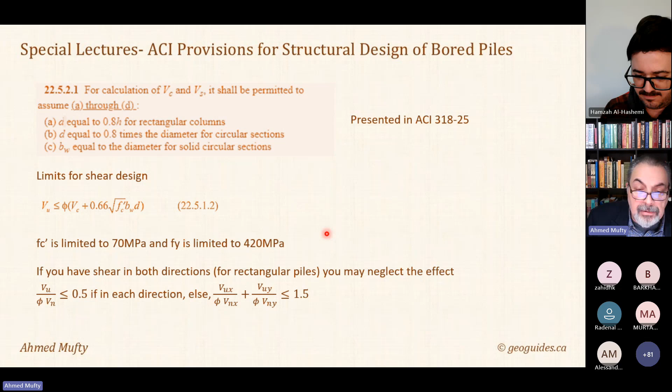This is the new methodology of calculating the shear strength. It's not there in 2014 and before. It is in 2019 and 2025.

At the end, Vs equals the difference between Vn and Vc, and Vs everybody knows is Av fy d over s, if we are not talking inclined. For piles, you are using two legs always on both sides, so the area of steel is as such.

Other provisions to be followed are for crack width, ACI 224; durability and lifetime, ACI 365; length, development, and splices, ACI 318-25. I couldn't include these, I know it will not be enough and I even passed my time, so I did not include them. I hope I can include them in the presentation.

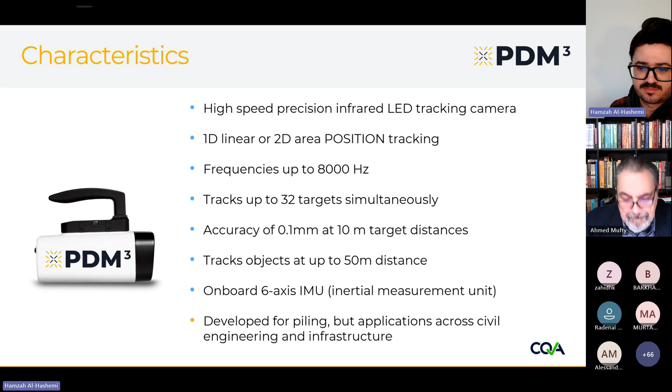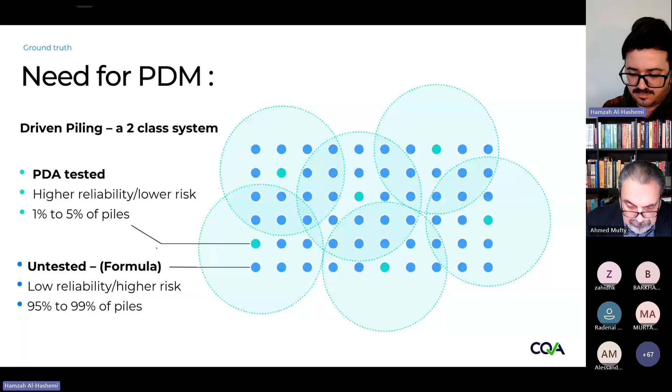But every pile is important, and the PDM was introduced to improve the overall project reliability by greatly improving the reliability of these 95% plus piles, which are not PDA tested. It does this not only by accurate measurement of the pile movement, but importantly, also the impact force delivered to the pile. Pile set is meaningless unless you also measure the input from the hammer into the pile. The PDM results can be related to the PDA tests to ensure that all piles are driven to the same standard.

The PDM provides quality assurance along with inherent safety that comes from non-contact measurement. It allows database input and output and full quality assurance reports for every pile at the time of driving.

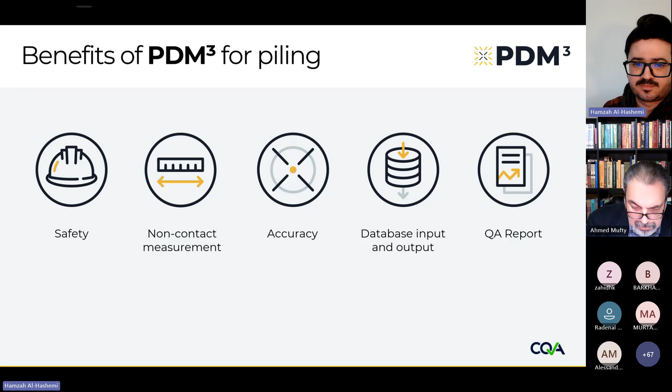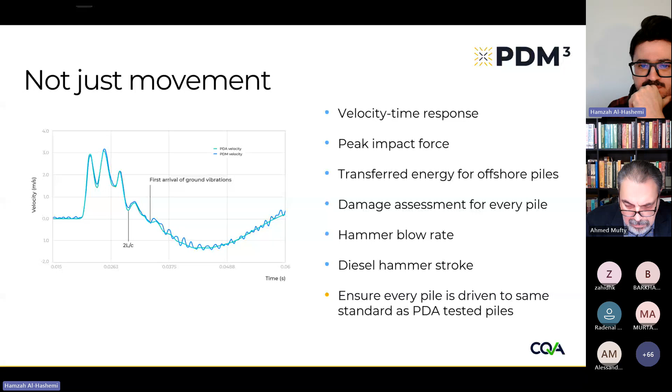Although the PDM has its origins in measurements of pile driving, the new capabilities of the PDM3 open up a wide range of measurement opportunities in civil engineering construction and infrastructure. These capabilities will be realised both in the current and ongoing rollout of applications.

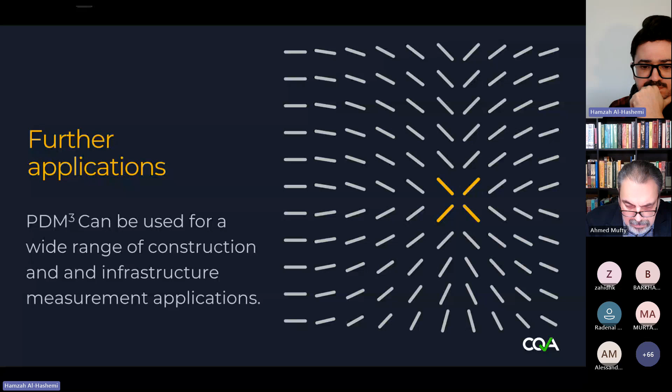The benefits of the PDM3 also extend to vibratory installed piles. The PDM3 provides continuous tracking of vibration frequency and amplitude, penetration rate, and driving force. The PDM3 opens up significant opportunities for installation optimization with variable frequency vibrators.

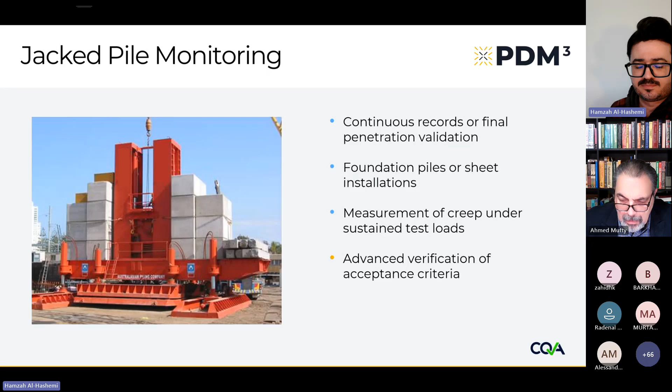The PDM3 is also used for jacked pile monitoring, either for continuous records or for the final penetration validation for foundation piles or sheet installations. It is particularly useful for accurate measurement of creep under sustained test loads, which provides the opportunity for advanced verification of acceptance criteria and improved quality assurance.

The PDM3 can also be used for static load testing, both onshore and offshore. Up to 32 targets can be monitored simultaneously. A particular advantage is that the PDM can make these measurements from outside the zone of influence of the test pile and reaction system.

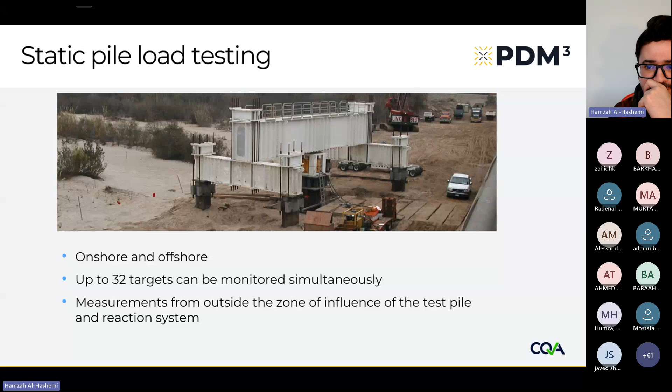Moving away from piling applications, the PDM is able to monitor the response of structures under dynamic loading. The monitoring frequency is 133 Hz, which is much higher than typical natural frequencies of most structures, which are less than 10 Hz.

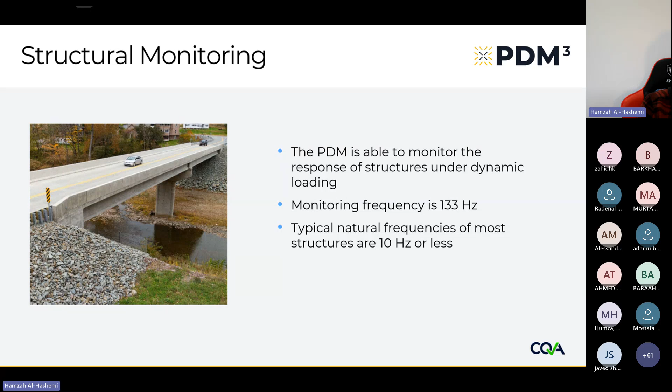We have a rollout program for further applications in 2025, including rail monitoring, compaction control, dynamic compaction, and SPT testing. There are particular benefits that the PDM brings to each of these applications, but I will only note that for SPT testing, the PDM can deliver the energy for every blow, accurate assessment of seating distance, accurate blow counts, equivalent N values at refusal blow counts, and shear wave velocity by using the inertial measurement unit response.

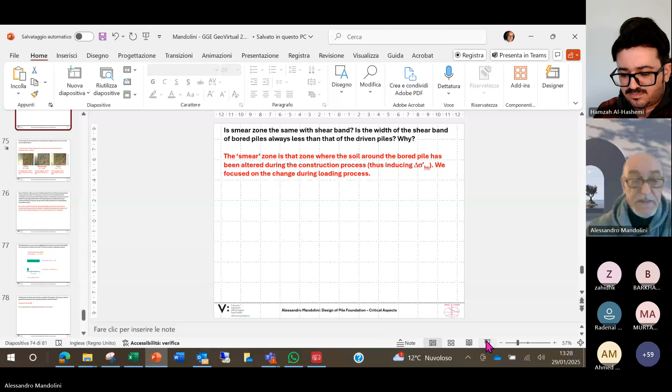This is due not to different mechanisms at the pile-soil interface, but to the fact that the interface was not soil-pile, but pile-cake-soil. So the skin friction is strongly affected, which is why I try to speak about correctly, properly constructed piles, because the error lies there. If we make an error during construction, unfortunately there is no theory able to predict our errors.

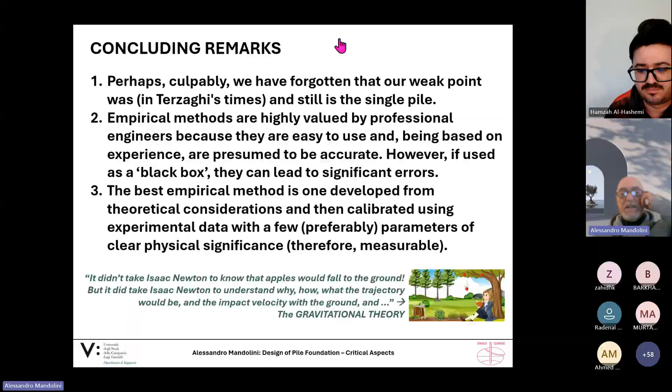If we have a rectangular section, like for a barrette, clearly things are slightly different. I personally did not do research on it, but a lot of literature comparing the behavior along the shaft of circular section piles and rectangular section barrettes demonstrated that the values obtained for circular piles are lower, smaller than those measured for barrettes. So you can use this kind of approach on the safety side, because for barrettes, the value should be more, not less.

I will briefly switch over to questions related to Dr. Ahmed Mufty - lots of questions, very nice ones. I think Dr. Ahmed has already gone through them. Let's see: how about lateral load due to out of verticality in case of barrette?